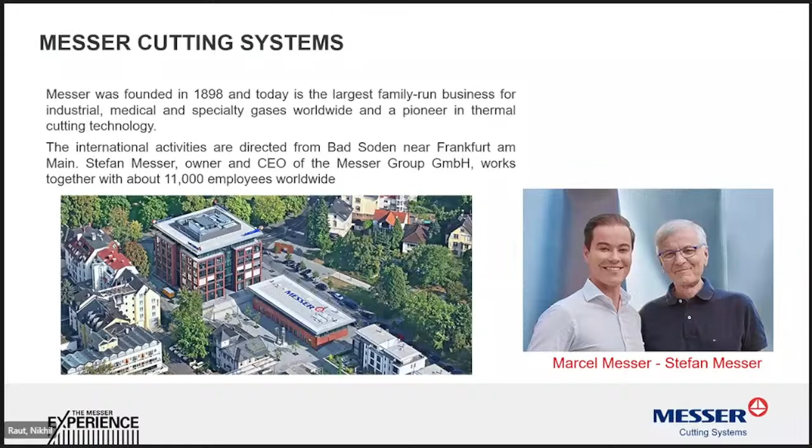Mr. Stefan Messer is the gentleman who was heading the company, and now he has handed over his reins to his son, Mr. Marcel Messer, who is the present chairman of the group.

In terms of how the group overall looks: they are majorly in gases. Unfortunately not in India, but Messer gases are very popular across the globe in Europe, now in North America, as well as China, Vietnam, and many Southeast Asian countries. They also have a group company called Spectron, which makes specialized gas control equipment. Then there is a company called BIT, which is into instrumentation. There is a carbon dioxide special gas company, and also a medical care company in Germany.

And we all belong to the group called Messer Cutting Systems. Messer Cutting Systems have primarily two business verticals. One is the complete gas equipment range, where we talk of right from a hand cutting torch to flashback arresters, panels, and everything. On the other side, it is the complete cutting machines business.

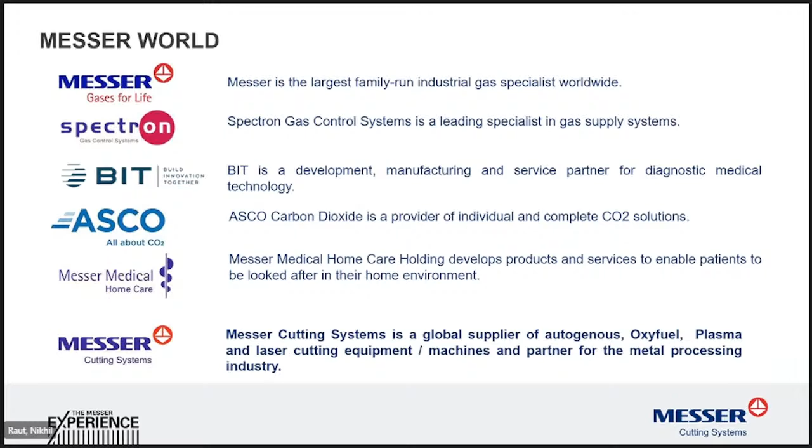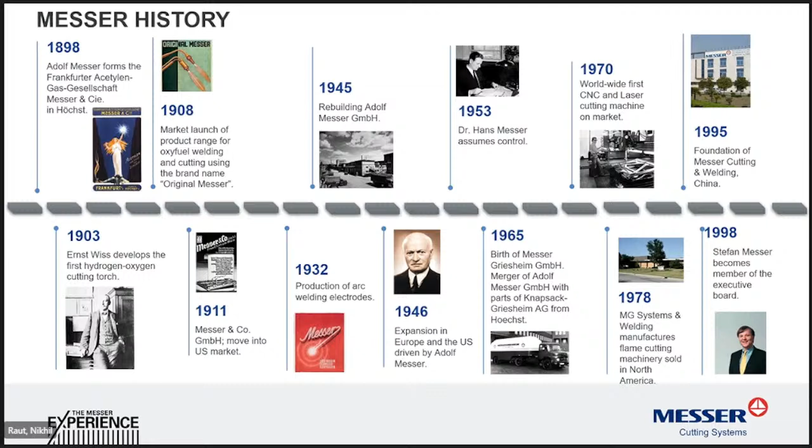So this is how the group looks like. It has a long history - I told you 1898 was the formation. I won't run through all the details, but you can see the different milestones on the part of Messer, and the journey continues. It also includes Messer India operations - I'll come to that, but you can go through the history. One after the other, milestones were achieved over a period of time, and the success story continues.

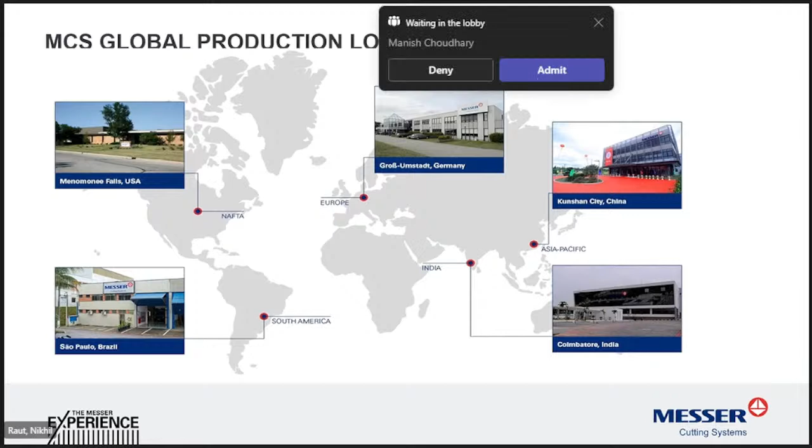Just a little bit about our global presence - the major plant, the mother plant, is in a place called Groß-Umstadt, in Germany. The second big plant is in Menomonee Falls, near Chicago in USA. There is also a Messer plant in the South American continent, Sao Paulo in Brazil, and in Kunshan, China. Our own Indian plant is in Coimbatore, the second largest city of Tamil Nadu. From Coimbatore we cover complete SAARC countries, as well as 6 countries in Africa, and also the Middle East region, as far as sales and services are concerned.

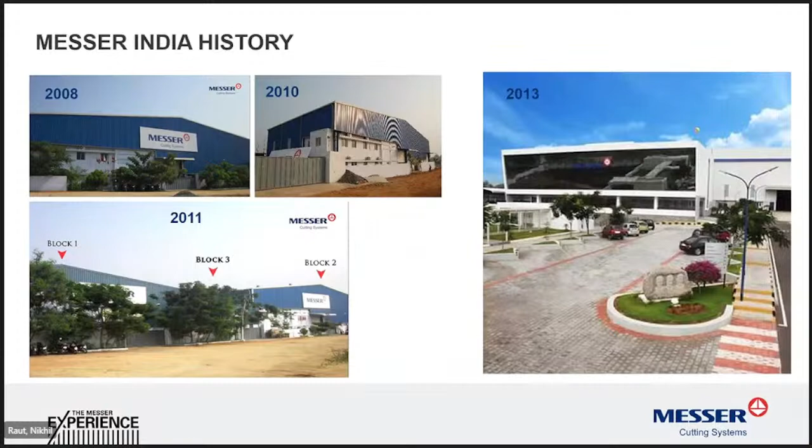I also take this opportunity to invite all my customers from the Middle East and India - in case you can manage it, you can visit this plant, or if you are in Coimbatore for some business meetings, kindly keep half a day reserved for Messer India and connect with the Messer India marketing team. We would like you to visit this plant and see the complete operations, quality management systems, and the complete setup of how the manufacturing of laser machines as well as plasma machines happens here.

We also, as part of the Make in India movement, manufacture gas equipment in a small section of this plant, and we are now exporting this gas equipment as well to Europe. The laser machines manufactured in this plant have also been exported.

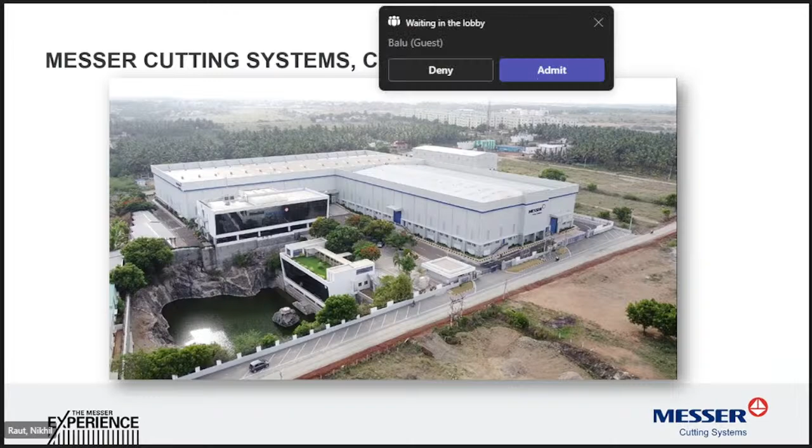Almost 20 machines now have gone to the Americas and Europe, the majority of them to Canada. So that's always a joy for us, made in India, exported to the developed nations. As you know, we are popular for the plasma machines, and we support these machines so they are always in uptime for the customers.

We have a wide network of sales and service team across India. So in every remote corner or industrial town, we have a service engineer who at any point of time keeps in touch with the customers so that all the machine service requirements can be handled. And we have complete design, R&D, sales, service, distribution, logistics, a complete team of approximately 250 employees in Messer India.

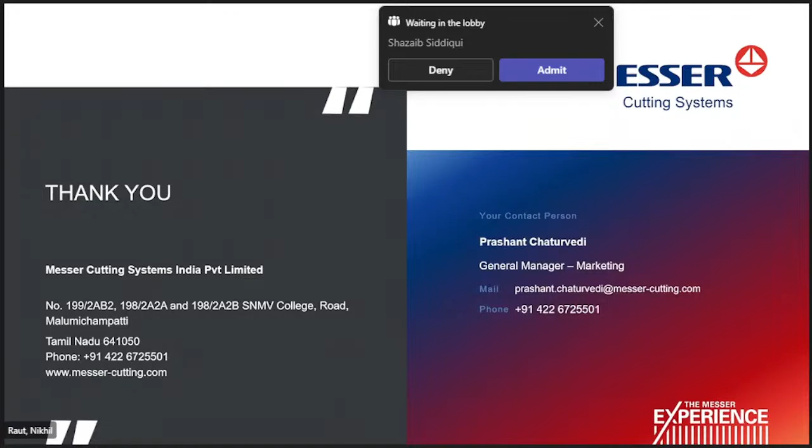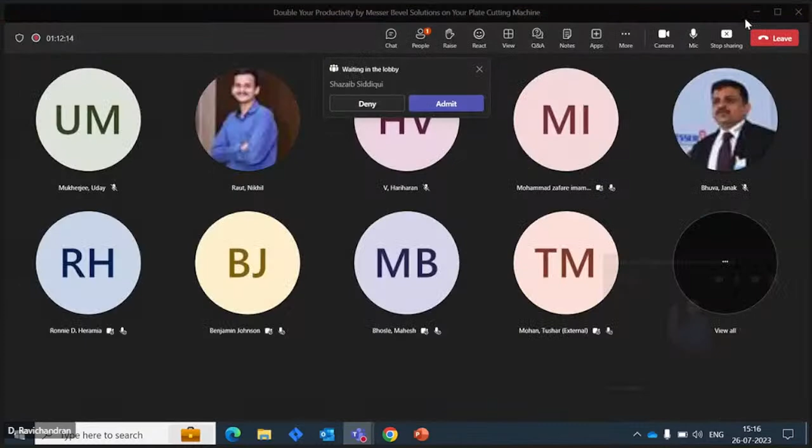Thank you very much. And thank you everyone for joining. Thanks, Prashant. Thanks for the wonderful opening you made. And let me share my screen. Hope my screen is visible. Am I audible? Yes, Ravi. We can see that. Yeah.

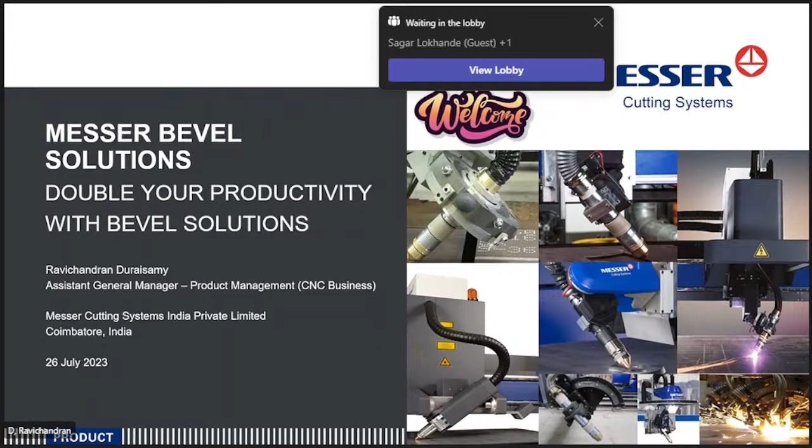Welcome everybody. I'll take a bit of an education mode, first telling you why we need beveling and how beveling has gone from a traditional way of production to automatic beveling. So why do we need a bevel in the first place? A bevel is needed for many reasons, like to create a better weld preparation, or else the equipment itself needs a bevel at the edge for safety reasons or for aesthetics or whatever reasons the equipment is designed for.

So mainly when you have welding, you have different types of bevels, like a V bevel, a Y bevel, a K bevel. All that amounts to getting a larger welding surface so that the welding is better and has stronger welded joints. It also helps to reduce the filler material used during welding. So one is the strength, one is the process optimization, and welding becomes faster, defectless, and stronger. This is in case of welding. And in case of edges, a beveled edge is needed to avoid accidents or scratches, or for aesthetics.

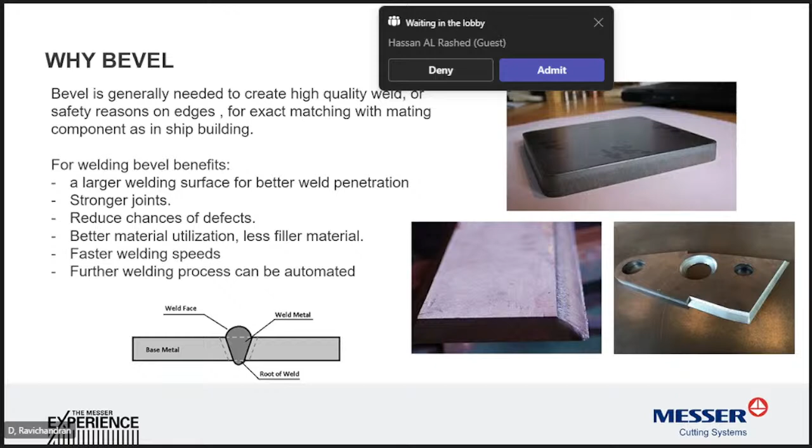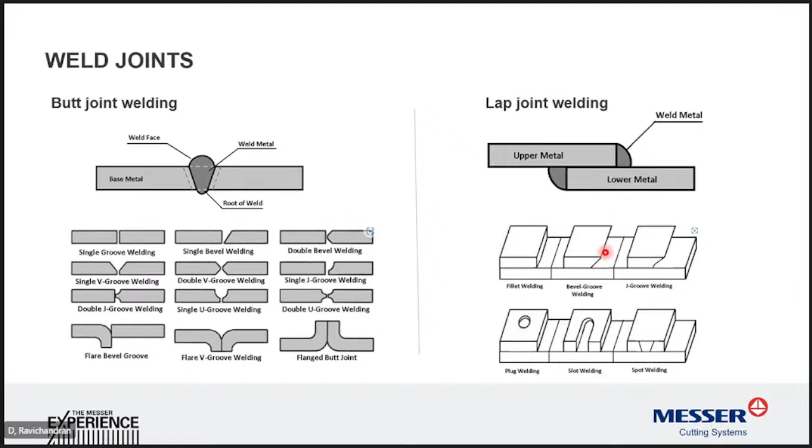So that's how a bevel is being created. And just to understand the different types of weld joints, we have got 5 types of weld joints. All these weld joints are much better when created with bevels. With lap joints also you get bevels. An edge joint is also better when a bevel edge is there, and the same for a T-joint and for a corner joint. So for any welding, it is better to have a beveled edge.

So how are we preparing the bevel in a traditional way? I'm not talking about the sophisticated way. In a traditional way, plates are cut using oxyfuel if it's a thicker plate, then plasma up to 50 to 60 mm, then laser up to 25 to 30 mm. So these plates are cut and the edges are square. That's what we call a vertical cut.

And then they are taken to another work center where the bevel can be prepared using a plasma bevel guide, or by an oxyfuel torch on a pug cutting machine, or you can do manual oxyfuel beveling with an oxyfuel torch, or else you can have bevel edge preparation cutters, where the material is scooped out on the edges using cutters, or by a simple grinding method, which is very crude.

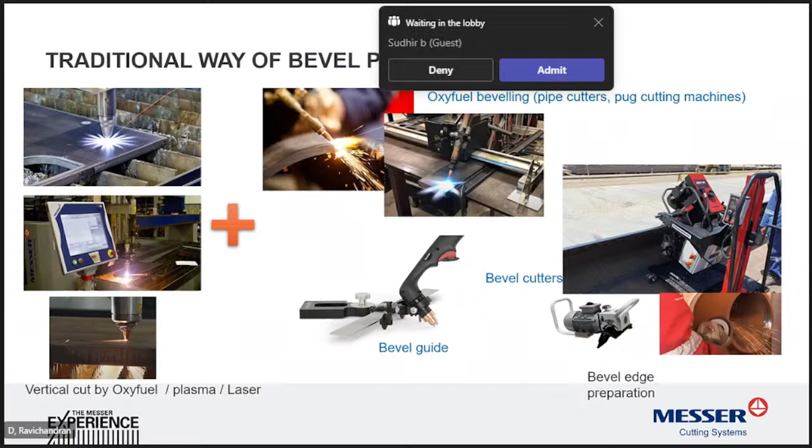The angle of bevel is not maintained throughout. But when you use a bevel cutter and a plasma bevel guide or a pug machine with an oxyfuel, your bevel is as per the requirement, but the time taken to cut is also increased. And moreover, you have an additional operation rather than cutting at the start itself with a bevel. If you don't do it, you have a straight cut, and then you have a second process wherein you have a bevel cutting. So this is the traditional way of bevel preparation.

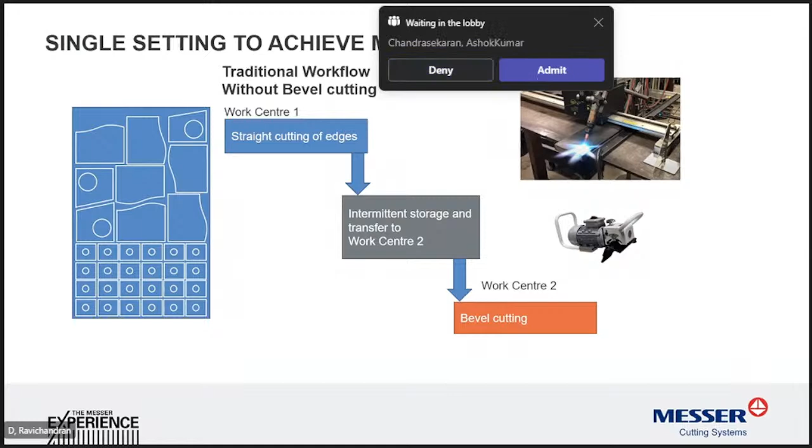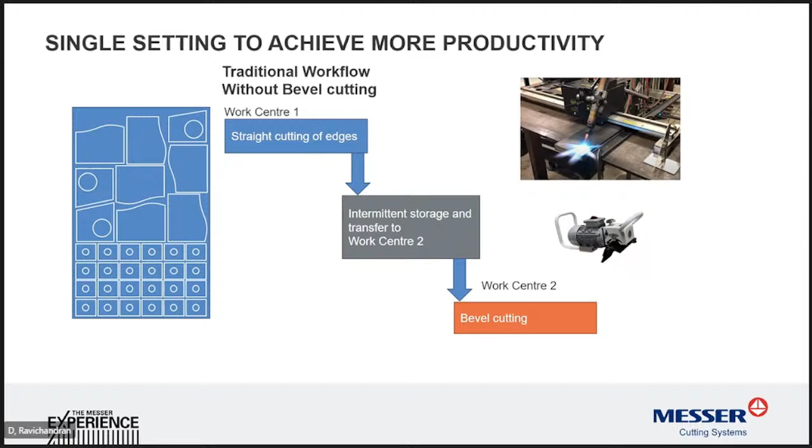When you cut, you have a nesting on a machine, and the edges are cut with a straight edge, and then you don't immediately transfer to the next workstation. You have an intermediate storage, and then you have a next work center. It can be anything: angle grinding, a bevel cutter, manual oxyfuel, or a pug machine. Then you have a second work center where the bevel cutting is actually done. So this is the traditional way.

When you use a bevel cutting machine, you don't take it to the second operation. On the primary machine itself, we have a bevel cutting machine. You actually cut the bevel immediately when you cut the straight edge. Sometimes if it's a V cut, you cut the V cut itself straight. So all fabrication units which are fabricating above half an inch thick plate, and on critical fabrications, have to have a bevel preparation.

I would say 30 to 40% of all the material which is cut by plasma, oxyfuel or laser of a thickness above 12 mm definitely needs a bevel preparation. Generally these are created by a secondary process like I explained earlier. So if we have a bevel cutting machine, all that secondary process is avoided. Your productivity increases by around 30 to 40%. That's how we say double your productivity in those cases.

And because you don't have a secondary operation, your time is saved, your production is increased, and non-value added activities like intermediate storage for the straight cut plates are not needed, and movement from work center 1 to the storage and storage to the next work center is not there. So all those non-value added activities go away, thereby your productivity is increased, your cutting cost is reduced, and your manual labor involvement is also reduced. That's the advantage of having a bevel cutting machine.

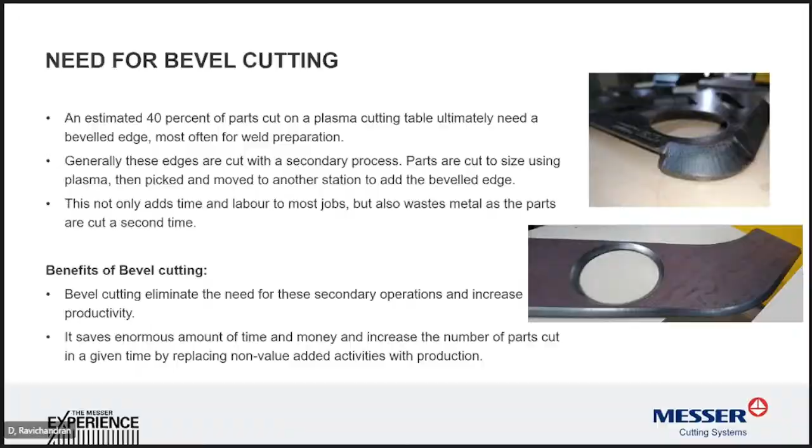In Messer, we have a whole lineup of equipment, from oxyfuel, plasma, and laser to do beveling. On the oxyfuel, we have manual indexing on the torch itself, and then the beveling oxyfuel torch using triple bevel, that's using 3 torches to cut a plate at one time. You can have X, Y, and K cuts, and the same triple bevel on an automatic version, so you can automatically define the angle, and contours can be cut wherein the whole bevel unit can rotate. All this is possible in oxyfuel.

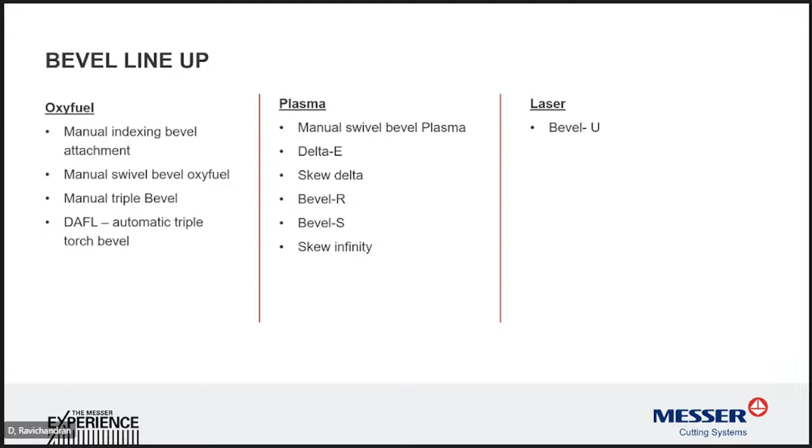In plasma, we have the manual bevel on the X and Y axis, where you just cut straight lines. Others are Delta E, Skew Delta, Bevel R, Bevel S, and Skew Infinity. These bevel equipments can cut between plus and minus 45 degrees on the required contour, as available in the nesting. These are available on different machines and capacities differ. We also have beveling on laser, named Bevel U. So on all 3 thermal cutting processes, we have equipment to cater to bevel applications.

What types of bevel can we use? We can have straight cut and V cut, either V up or down, VAS or VDS. You have the Y cut, so the material is cut like this and the opposite material comes here for welding; this is YAS and YDS. The X cut, where you don't have a land between both bevel edges, and the K cut, where you have a land between the top and bottom bevel surfaces. These are the types of bevels normally needed, which can be cut by the bevel equipment.

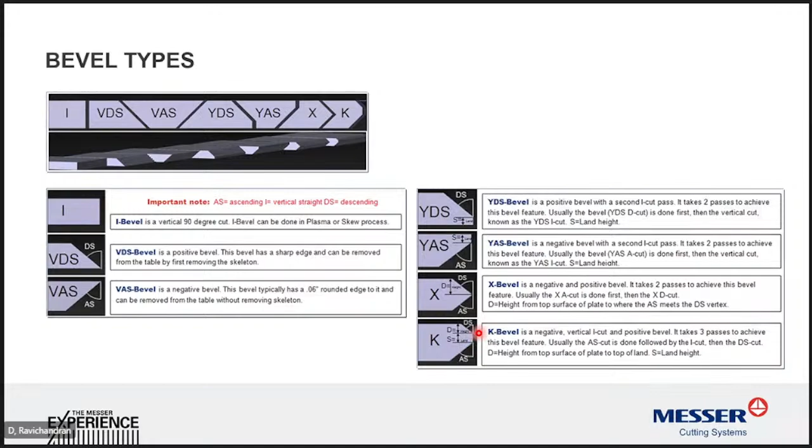And coming to the lineup, I will just breeze through the different types of bevel equipment we have, right from the ordinary bevel torch attachment to the sophisticated bevel cutting equipment.

So the first one is a swiveling torch attachment, which you can see on our MS932, where it can be angled along the X-axis, or it can be turned and pushed on the Y-axis. So you can cut a straight bevel or in an inclined direction also, but only in a straight line. So this is just entry-level beveling equipment, which can be used in one of our torches called MS932.

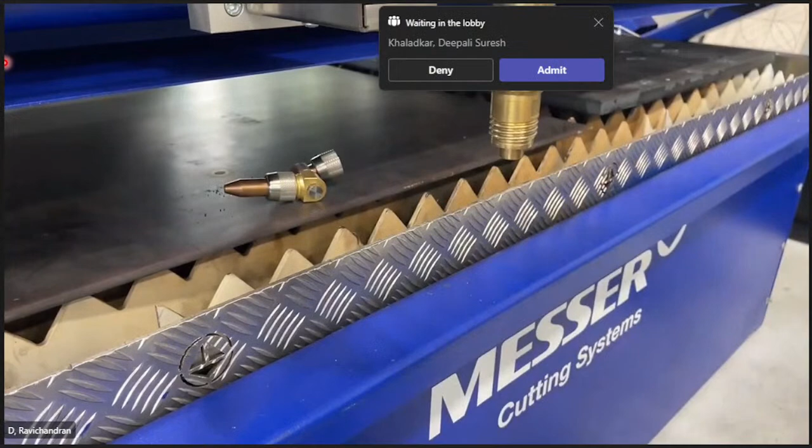And the video is, so the torch in the nozzle is replaced by a beveling attachment. And it can be rotated on the X and Y axis, and you can cut the bevel.

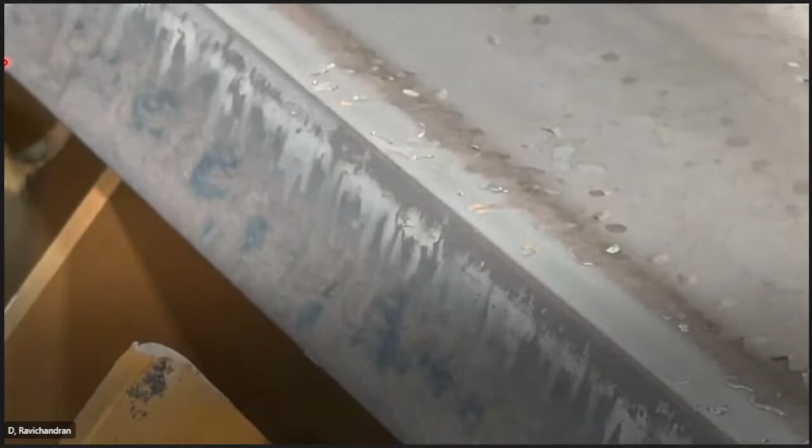And the next one is the manual indexing bevel, wherein only on the X-axis you can do the beveling, and we have a scale on the torch mount. So the torch can be swiveled, and both our MS932 and ALFA torches can be adapted to this, and we can have bevel cutting in the longitudinal axis. These are available in all our legacy machines: OmniMat L, MultiTherm Pro, Profitherm, and TerraBlade D.

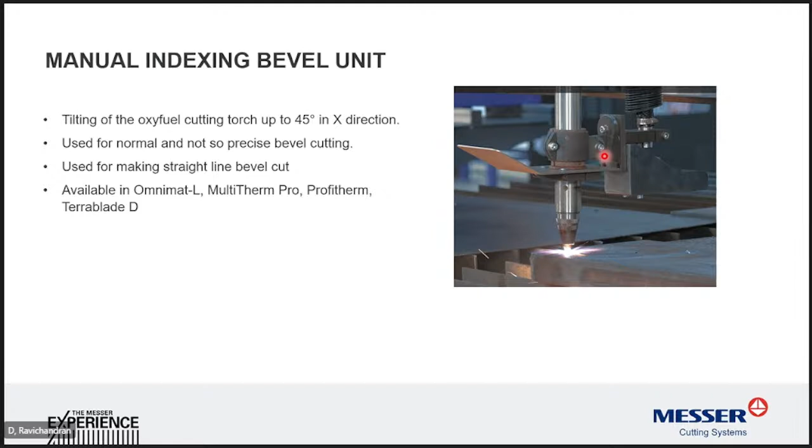And next comes the manual oxyfuel triple bevel. This has 3 torches. These are special short torches mounted on the unit, which can create a straight cut using one torch, a K cut using 3 torches, or an X cut using 2 torches. The only thing is we don't need to remove it; it's only the ignition part of it. So you can have a straight, V, X, Y, and K cut also.

And the cutting is done simultaneously as 3 torches are involved in the bevel process. The angle and the distance between the torches are all manually set. And you can have strip cutting also; you can cut 2 strips when the 3 torches are vertically straight, pointing downwards. And at plus or minus 45 degrees, you can have the bevel cut.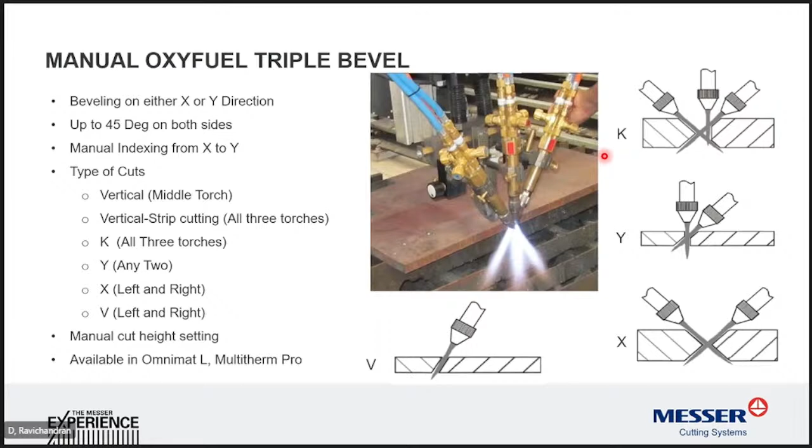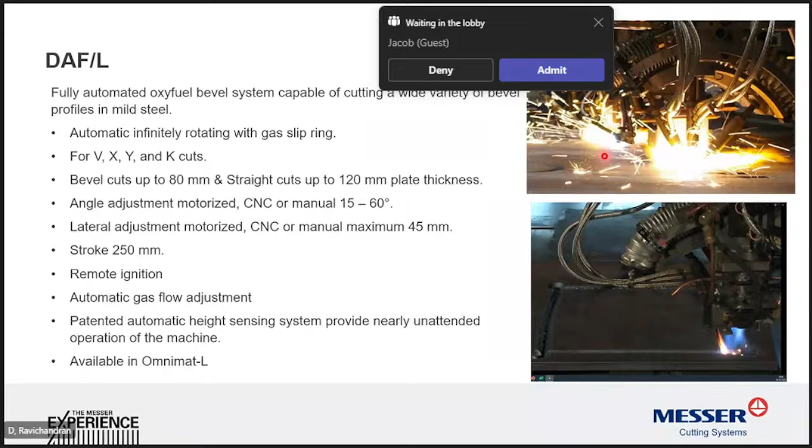And the next one is the DAF/L, wherein the same thing you've seen earlier is automated. Automated in the sense that the bevel angle can be programmed and contours can be cut. The earlier oxyfuel bevel cutting equipment I've explained is for straight cutting only. But this particular DAF/L torch has the provision to cut along contours. The whole unit can rotate, so you can have full circular cutting of bevel or any contour needed.

So you can get V, X, Y, and K cuts, similar to the other one. But the maximum cutting thickness would be up to 45 mm. This is available in our OmniMat L, which can go up to around 10 meters of track width. These are mostly used in windmill operations and shipbuilding operations.

So this is just information on the bevel angle, what can be cut, and the thickness: from 16 up to 45 you can have, and the maximum bevel angle is up to 60 degrees, whereas the other bevel units were only up to 45 degrees. So these are all about the oxyfuel bevel units.

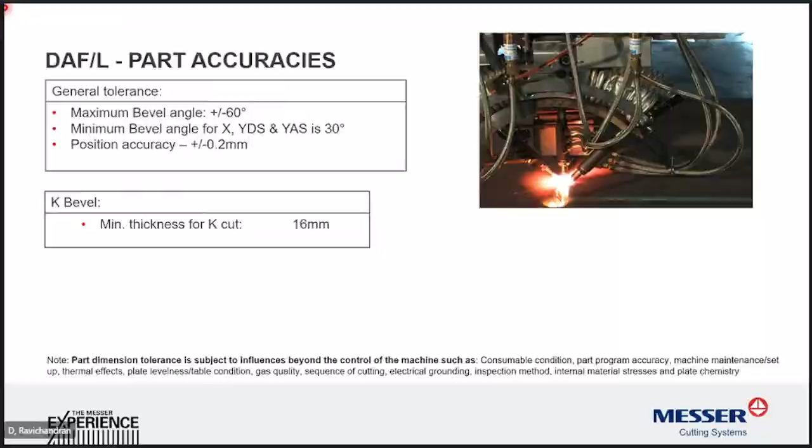The next one is the plasma bevel units. Starting, I'll talk about the manual swivel bevel, wherein the torch is held on equipment with a swiveling attachment of plus or minus 45 degrees. This is applicable for bevels only in the longitudinal and the transverse, that's the X and Y direction, and you can go up to 45 degrees.

You have to manually index the torch, move it, lock it, and then do the cutting. So this is our plasma manual swivel bevel. And for automatic beveling, we have 4 types of automatic bevel units.

One is the Delta E, which can cut at plus 45 to minus 45 angle. And then this is not an infinite rotation. This has got a limitation wherein you can rotate the torch for 460 degrees, and again it has to retract back, but that will not affect the cutting.

This is a TCP bevel unit, and this can be used for plasma cutting application up to 800 amps. That's the USP of this unit. And then this is like plus or minus 45 degrees, and you can have a V, a Y, an X, and a K.

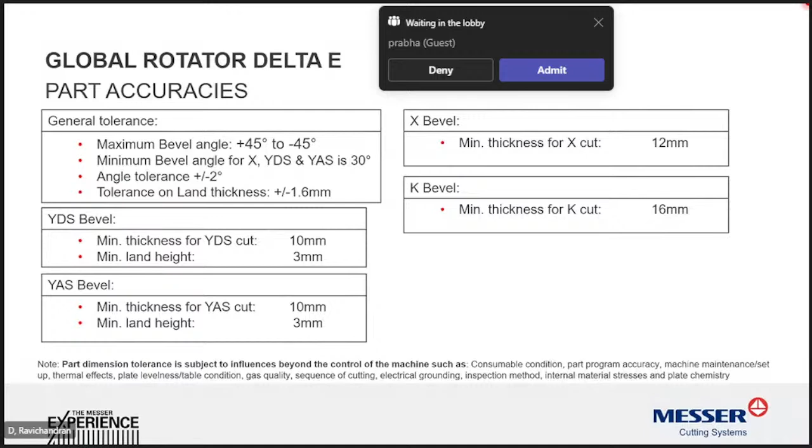So minimum thickness of plate where a bevel is possible is 10 mm in case of YDS, that's a Y angle. And then X bevel is where you have the bevel cut crossing at the middle of the plate; its minimum is 12 mm. And when you want to have a land in between the top and bottom, the minimum thickness of the plate is 16 mm.

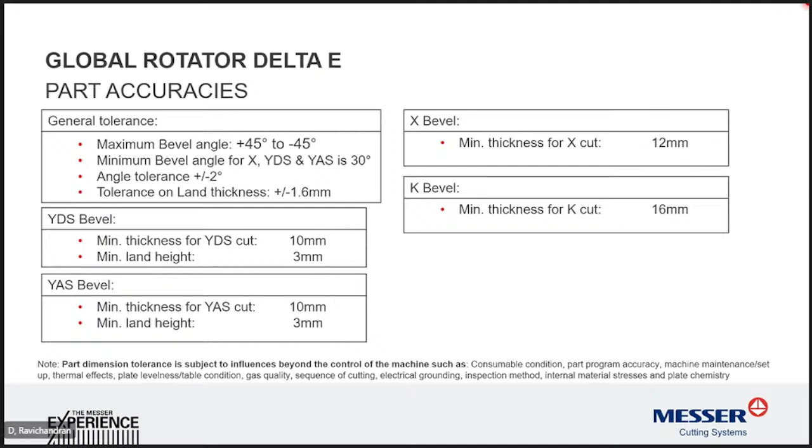So if you can see, this is a full-fledged automatic bevel unit. There's no manual setting or manual guiding or manual locking on this unit. It straight away comes from the controller; it's fully operated by the controller. Only thing is it can be used for bevel cutting applications using 800 amps.

A similar type of equipment, only the cabling management is different, and for bevel cutting application up to 400 amps we have the Skew Delta. It can be rotated up to 450 degrees, and it's a compact unit. You can have even a glare curtain so that the operator doesn't have the effect of looking at the plasma flame.

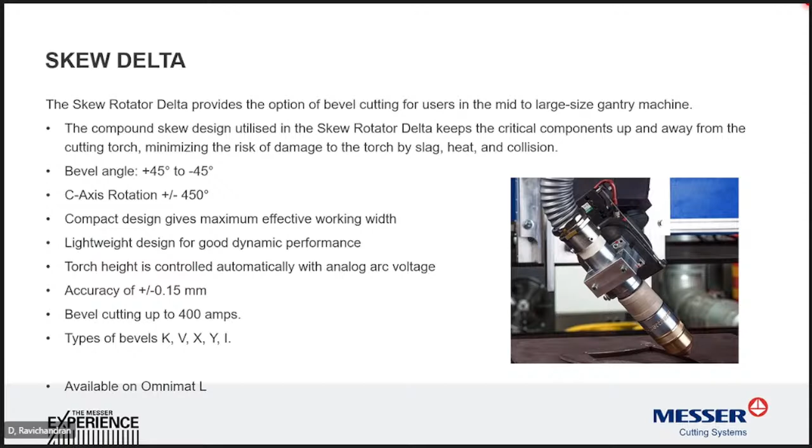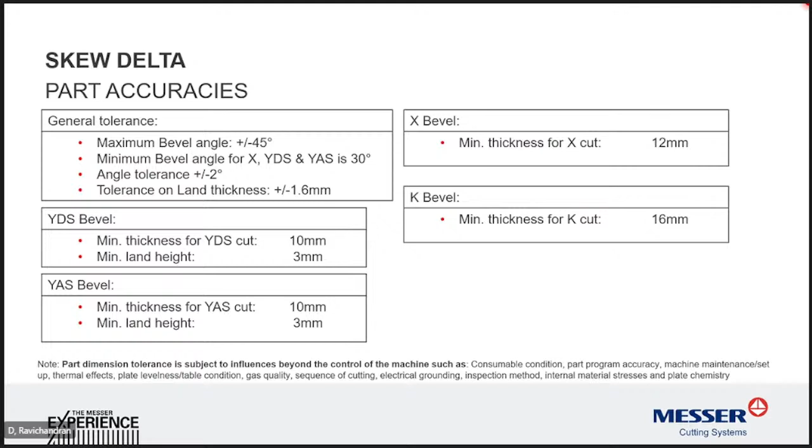Other than that, this is available in our OmniMat L, and this is actually a product designed in Germany, which we are manufacturing over here. In a similar way, the same cutting parameters of thickness for YDS, the X bevel and the K bevel remain the same as in the Delta E.

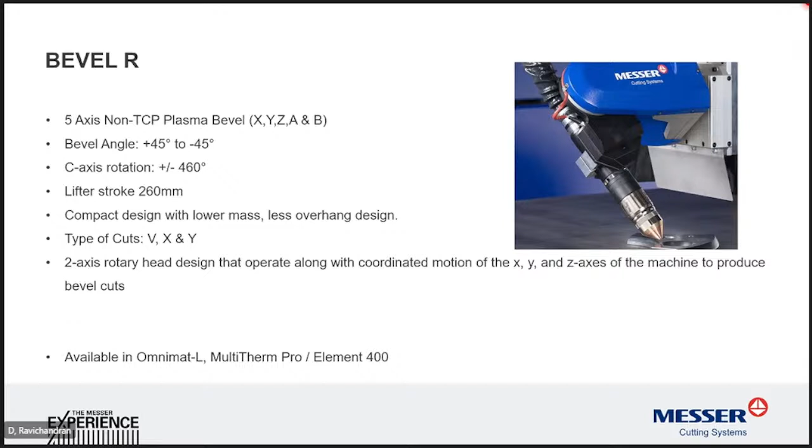And the next is our Bevel R. This is a lighter, compact bevel equipment, which can be available in all the high definition machines like OmniMat L, MultiTherm Pro, and Element 400. Similarly, C-axis rotation is 460, you can have a bevel angle of minus 45 to plus 45, and it has an individual lifter for 260 mm.

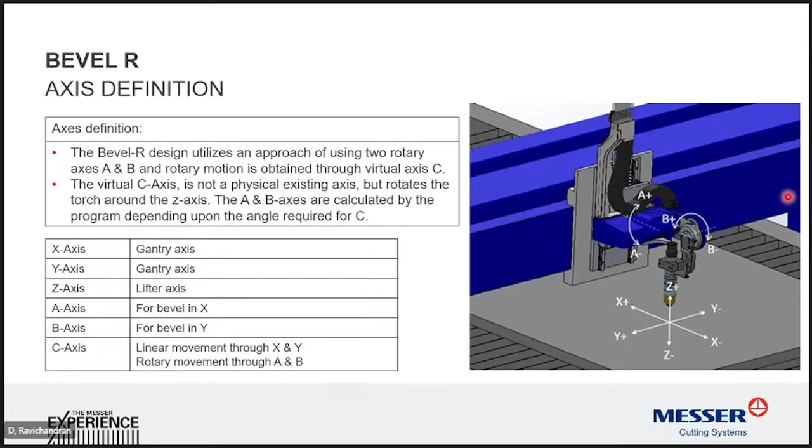And since it's a compact and overhang type of thing, this is not a TCP bevel. It takes the machine movement also in synchronization to create the bevel. So you have the B rotary axis of the torch and the A axis on the transverse plane, and these two axes in combination with the machine movement of X and Y create the bevel cutting. Similarly, all the bevel cutting parameters remain the same in terms of thickness.

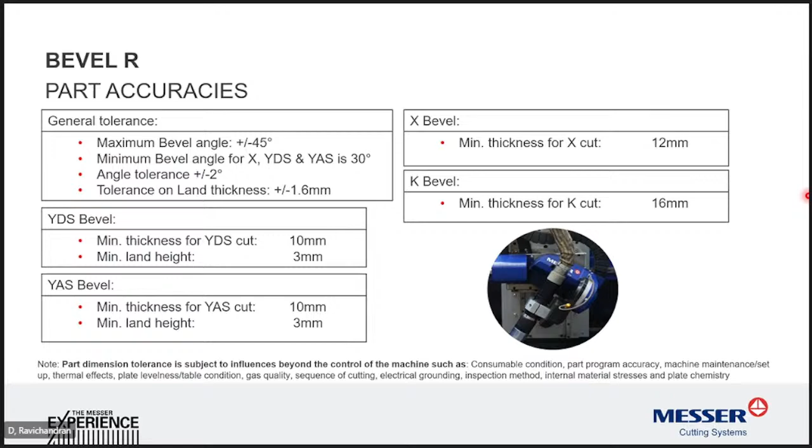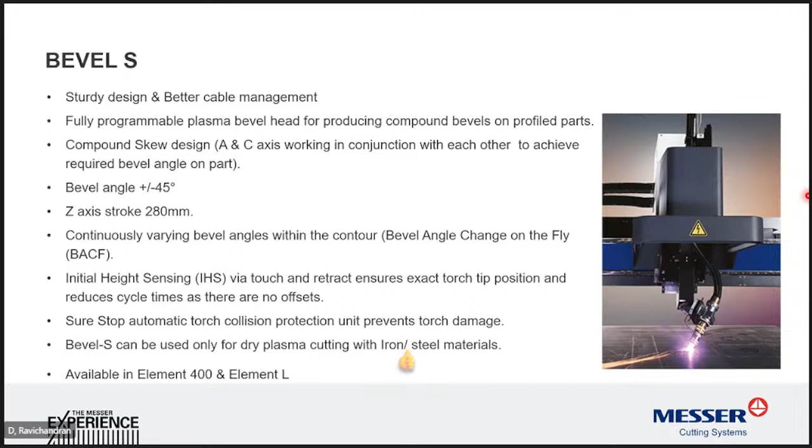And this is a picture wherein you have two axes on the bevel with a rotary unit. This is a TCP, where the machine movement is not included when you want to have a bevel, unlike the Bevel R. All the bevel parameters remain the same as the previous ones. And this is a video to showcase how it's operating.

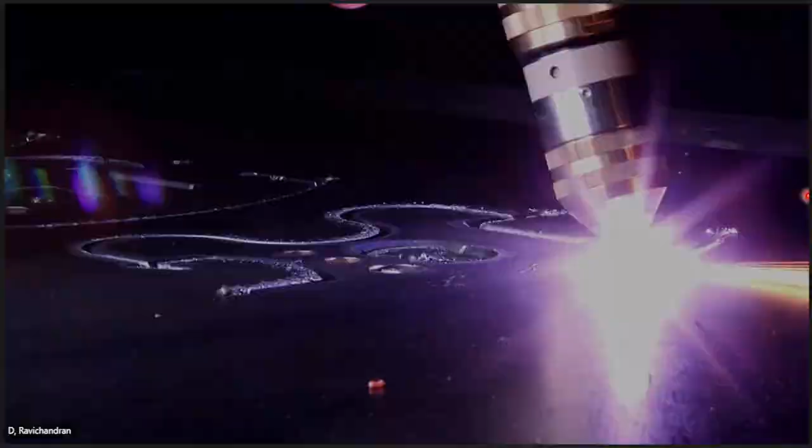Next one is the Skew Infinity. Earlier we were always talking about a rotation angle of 450 to 460 degrees. So when a bevel unit cuts a 360, you have an excess angle of around 50 degrees on both sides, but still it has to return back to its home position to cut the next circle. But this Skew Infinity doesn't have that limitation.

We call it infinity because you can rotate it in an infinite way, and the unit need not retract back. So what happens is you don't lose time for the unit to retract back to its home position. Apart from that, the same thing, like bevel angle can be from minus 45 to plus 50 degrees and unlimited C-axis rotation. So when you don't have the limitation of the torch coming back to its home position, you don't lose time. So this reduces the cycle time of cutting.

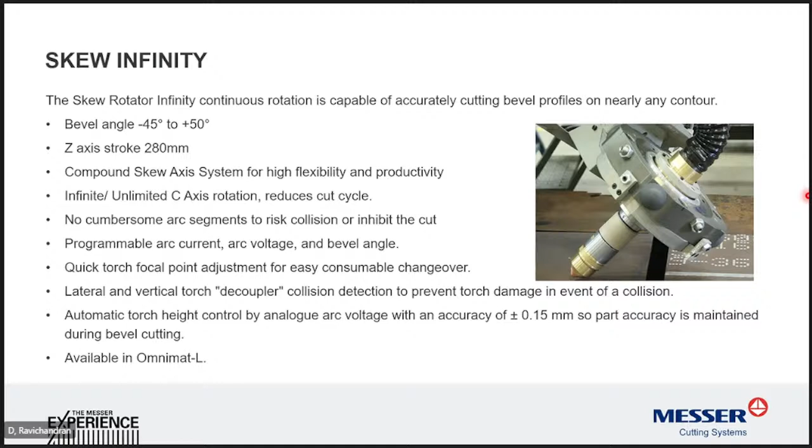So this is available in our OmniMat L. Again, to say OmniMat L, you can have it up to 10 meters width. Skew infinity, the same thing. And the cutting parameters remain the same in terms of thickness.

Then laser bevel. We are the only company in India who can offer, in the sense made in India, laser beveling as of now. So this has got a B and A axis, which rotates along the longitudinal and the transverse direction to create the bevel. You can have contour cutting, bevel contour cutting. And again, the angle is between plus or minus 45 degrees.

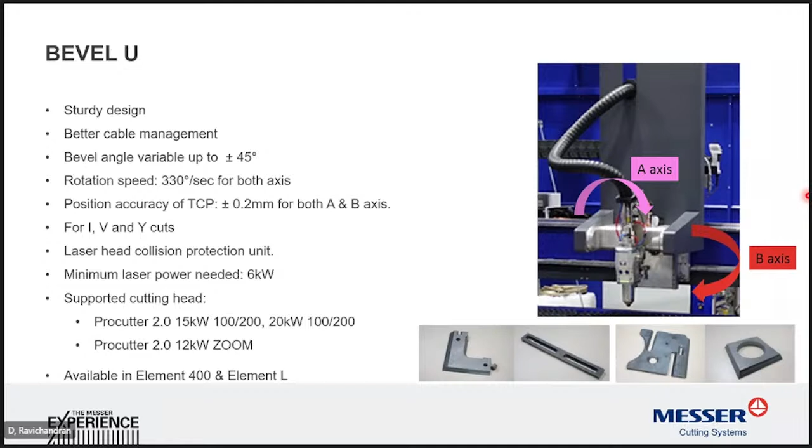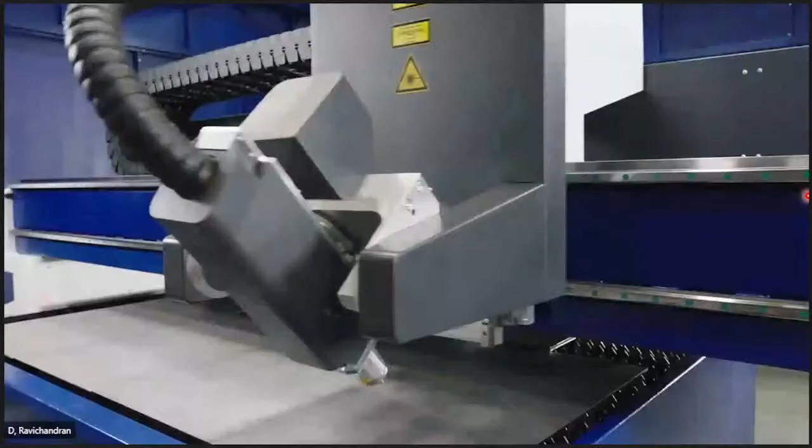And this can be used with the laser power of 6 kilowatt and above, because that's the minimum power you need to have for a 25 mm cutting. So this is available in Element 400 and Element L. So this is a video to show how the laser bevel is used. Here we are cutting a Y bevel, so a straight cut has already been made and the bevel portion is being cut.

So this is the lineup we have. We have a whole range of beveling equipment for oxyfuel, plasma, and laser applications, and to show a gamut of these bevel units with the compatibility of our machines. We have a whole range of machines: TerraBlade, Profitherm, Multitherm, OmniMat, and Element 400, wherein OmniMat and Element 400 are machines where laser can be used, and all the other machines are plasma and oxyfuel machines.

So now to go back to the earlier slide, where I was showcasing that the traditional way was cutting a plate for a vertical edge, square edge, and then creating the bevel by a secondary operation. Now is the time where we can embrace the new technology by using the bevel units, be it plasma, oxyfuel, or laser. Thereby, we can reduce your process time by around 40%, and cost by at least around 30%. And you are not duplicating your assets for creating a bevel edge.

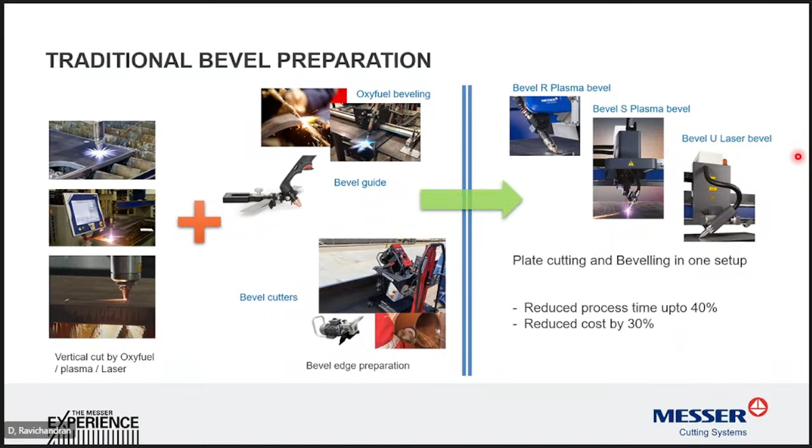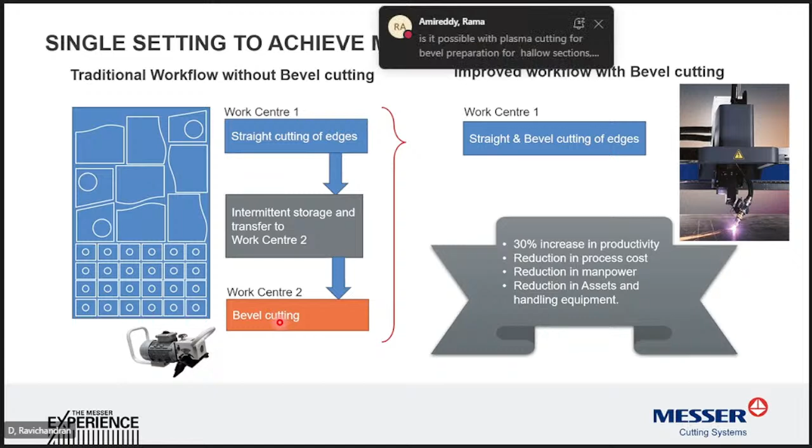Earlier, a traditional flow would have a nesting where straight cut edges were cut, and then the bevel cut in a second work center. Now in a single work center, the bevel is cut straight away, right from the plate itself, so that your productivity is increased, your process cost is reduced, your dependency on manpower is reduced, and there's a reduction in dependency on handling equipment and assets.

So this is just to show you the gamut of machines. We have the Smart Blade, TerraBlade, Profitherm, Multitherm Pro, all oxyfuel plasma machines. And OmniMat L and Element 400 are oxyfuel and plasma, and laser can also be used in these machines. Here in these two machines, we have the simple bevel attachment for oxyfuel. In Multitherm Pro, apart from the oxyfuel, we have got the Bevel R, where you can cut the contours using plasma.

In OmniMat L, you have oxyfuel beveling on contour, as well as the Bevel R and Bevel S. And in Element 400, we have got the Bevel R, the non-TCP type of bevel unit, the Bevel S, which is the TCP type of bevel unit, and the Bevel U, the laser bevel unit.

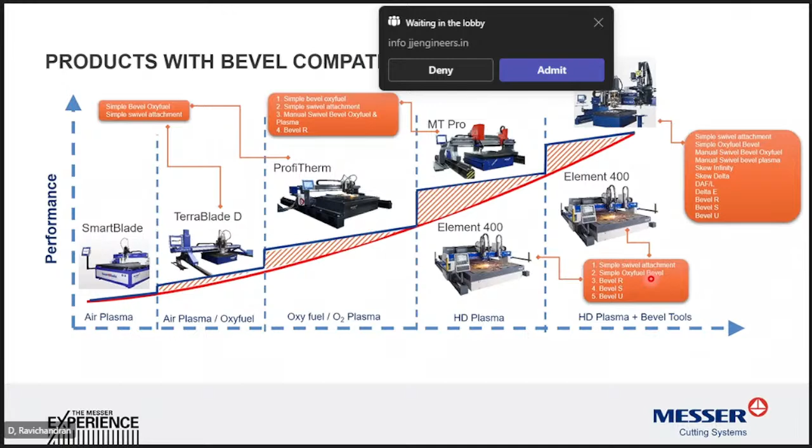So I think I just breezed through, not much in detail, and I would ask Mr. Janak, our Director of Sales, to take us through the application part of bevel cutting. Over to you, Janak. Thank you, Ravi, for giving the brief introduction about the bevel cutting tools we have available.

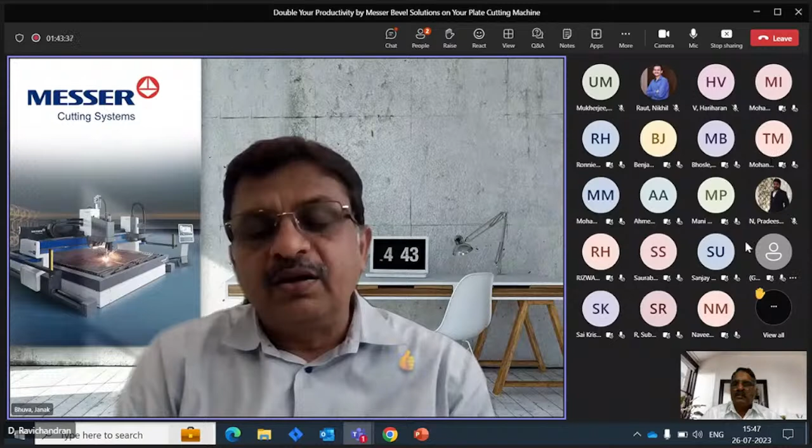I will run through the practical applications available in the case of the bevel application. It's very important to know, as Ravi mentioned, that when you do the bevel, the demand of accuracy level is very high, and the tool we use should perform in that direction. If you are not getting enough accuracy while performing the bevel, it cannot be used for automation applications like automated welding or robot welding.

Since this is not a contact cutting, the plate is not cut by the contact process, it's by the thermal process, either oxyfuel, laser or plasma. These are non-contact cuttings, so tool and machine response time is very important to get the accuracy and dimension of the parts. That is where Messer plays an important role, and over the period of time we try to improve productivity by providing good accuracy cut parts for bevels, so you can use these parts for further processes like automation welding or robotic welding.

With this, I will go through some industry uses for bevels. As I said, this covers plasma, laser, and oxyfuel. Primarily plasma bevels are used in railways, heavy fabrications where people use high thickness, maybe 30-40 mm, apart from yellow goods like JCB, Hyundai, Sany Electric, Sany Heavy Engineers - there is very good application there. Then PEB manufacturers, shipyards, boilers, and construction and mining equipment. These are the industries where plasma bevel applications are mostly widely used worldwide, and slowly people in India have started using this.

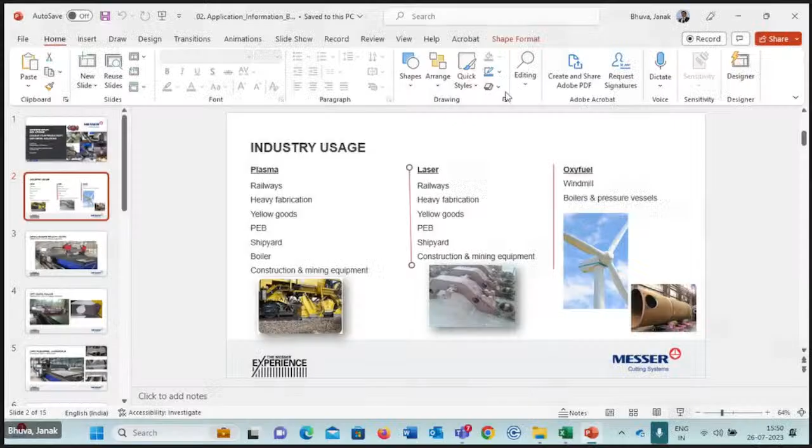I was talking about construction and mining equipment, where plasma bevel applications are widely used worldwide, and slowly it's getting used in India also. Earlier any automatic bevel equipment was very costly and capital investment was very high. Over the period of time, it's reduced drastically. If you compare today's bevel application machines, it's almost half the price of what it was around 2010 or 2015, and that is the reason small fabricators or vendors of big companies have started using plasma application also.

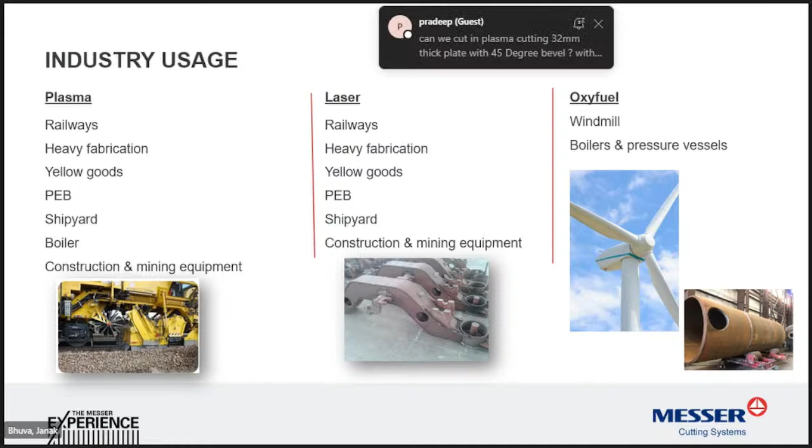Apart from this, we have laser. It's mostly used in industries like railway, again heavy fabrication, yellow goods, PEB, shipyard, and construction and mining equipment. Laser is mostly used below 20 mm where the bevel is required, mostly in V cuts, where you don't require the root face. That is mostly used by people in laser applications with bevel. Finally, windmill, boiler and pressure vessels, where the thickness is sometimes more than 30, 40, 50 mm, and with mild steel people use the oxyfuel bevel. So these are the three processes - plasma, laser, and oxyfuel - used in various industries, as I mentioned.

To give you an example, this is one customer called Mega Servo, located somewhere near Hyderabad. They are using our plasma bevel for their railway equipment. This customer is a railway equipment manufacturer, and they are using plasma bevel with a 300 A plasma power source with Bevel R, which is a fully automatic beveling tool.

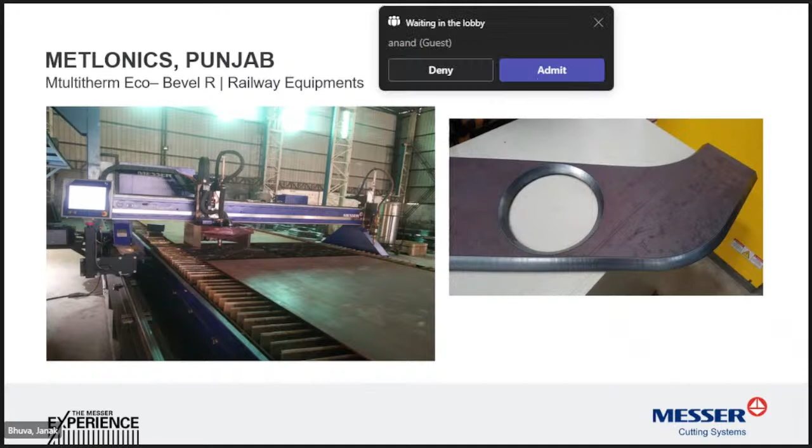Moving to the next one, this is Metlonics. You can see on the right hand side the cutting components, where inside the job the circle is cut at 45 degrees with some root face around 2 mm. You can easily see it, and the outer portion is only the V cut. This kind of component can be cut with Bevel R using the Multitherm Eco application. This customer is located in Metlonics, in the Punjab area.

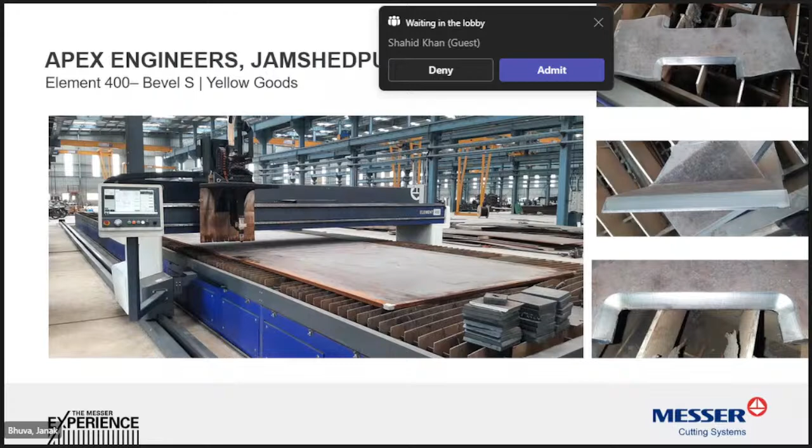When you use the bevel tool on your plasma machine, there's a very important advantage that a lot of people forget. Any plasma cutting, straight cutting, will have a taper, and by putting the bevel tool, that taper can be eliminated. You can cut plasma parts in straight cutting with almost zero taper, because bevel tools have a facility that automatically compensates that 1 or 2 degree plasma application limitation angle in reverse direction. So this is one of the advantages even in straight profile cutting when you have a bevel tool available. It's a very important tool that can improve your quality of cut without taper, with almost zero taper.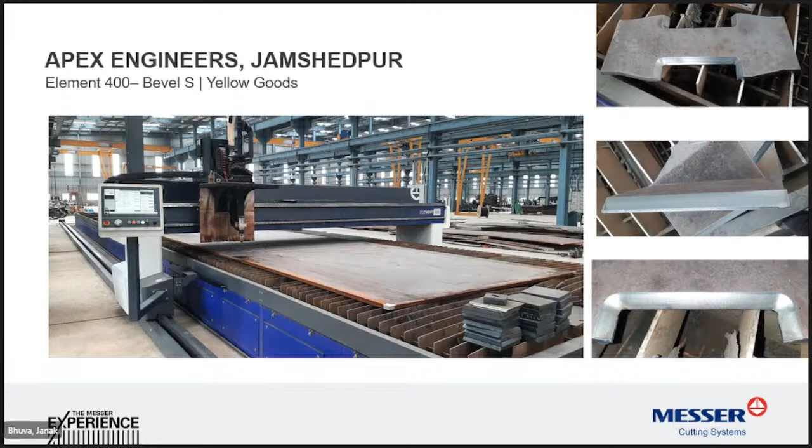This is another example, an Element 400. We installed this machine around 4 years back with the 400 ampere plasma power source, that is Hypertherm. You can see on the right hand side some components with V cut, Y cut, and root face around 6mm, 4mm depending on customer requirement. Some job is 50mm with 4mm root face. This machine length is around 40 meters and width around 6 meters.

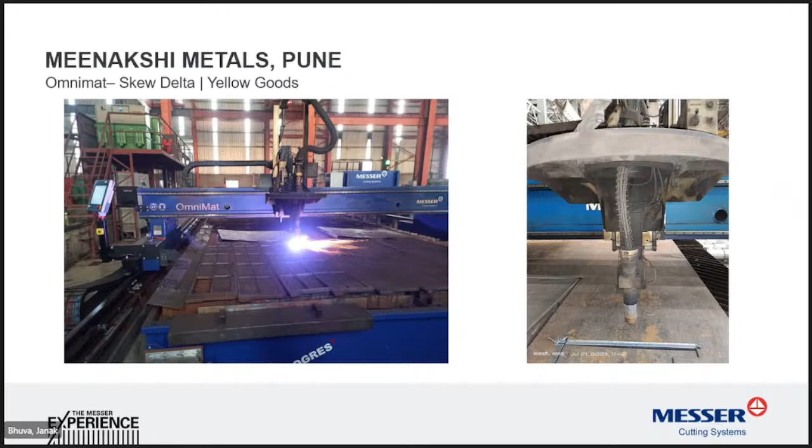This is another one, installed around 2 years back, at Meenakshi Metal. They are job work or vendor of big companies like Plasser, and also vendor of the railways, doing a lot of jobs for them. We installed the Skew Delta with the Omnimat machine, also with 400 ampere. This machine can pierce up to 50mm and do bevel on any job up to 50mm mild steel, SS, or aluminum plates.

This is the Omnimat again with the Skew Delta and Kjellberg power source called Hi Focus 360i. This company is located in Baroda.

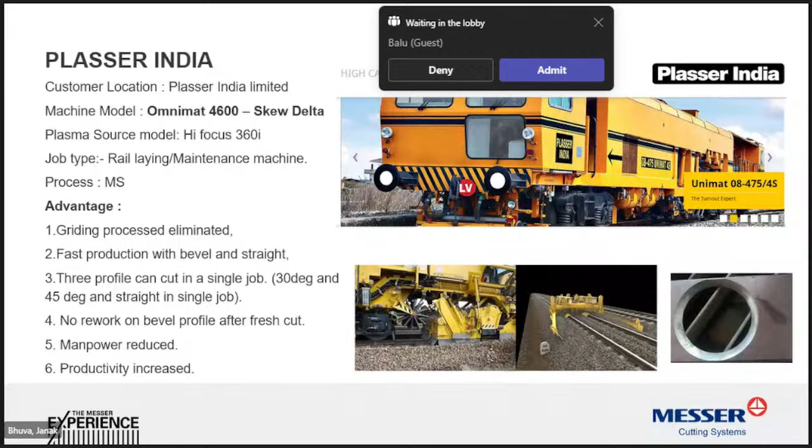This track laying equipment company called Plasser is basically a multinational of Austrian origin, and they started using the bevel machine with the 360i. They are doing 16mm, 20mm bevel with root face around 2mm, 3mm throughout the profile, mostly to manufacture rail track laying machines which they supply to the Indian railways. This is very important, and accuracy for this kind of job is very high, so they require consistency of 2mm root face, which our machine can easily give in plasma machines.

Normally this kind of machine has a very wide width, around 8 meters, 10 meters, depending on customer requirement, because normally plate size in shipbuilding is around 4 meters, 4.5 meters. So we provide around 11 meter width machines, and length around 40 meters, where they can keep 12 meter or 16 meter plates simultaneously parallel together. This is a very typical application where people can do mirror imaging together with bevel application. Recently we also supplied Cochin and Hooghly shipyard similar kinds of machines to manufacture ship activity in Hooghly, Kolkata.

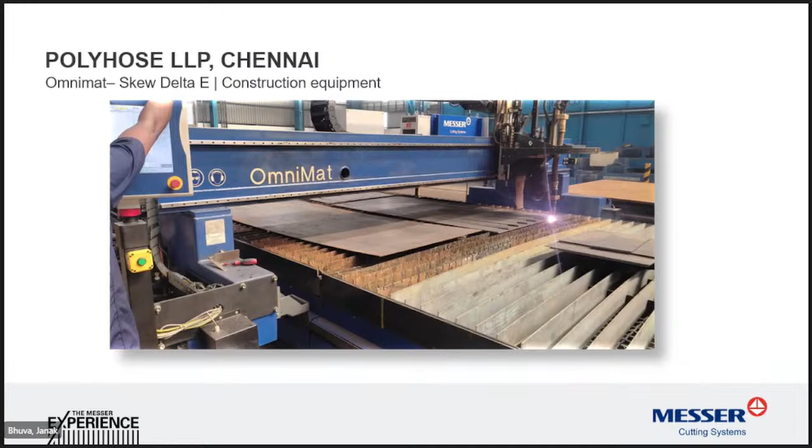This is another one, a yellow goods supplier, construction equipment manufacturer, or vendor of construction companies like Lee Boy or Komatsu, with a big workshop in Chennai area. We supplied one bevel machine for their applications with the 300 ampere plasma power source and Delta E kind of skew rotator.

This is Amtek Rajpura. We supplied this machine in 2008 or 2009 for a railway coach manufacturer. You can see the bogie component below, the next welded component, and also the cut components above. This machine is in the Punjab area with a HPR400XD.

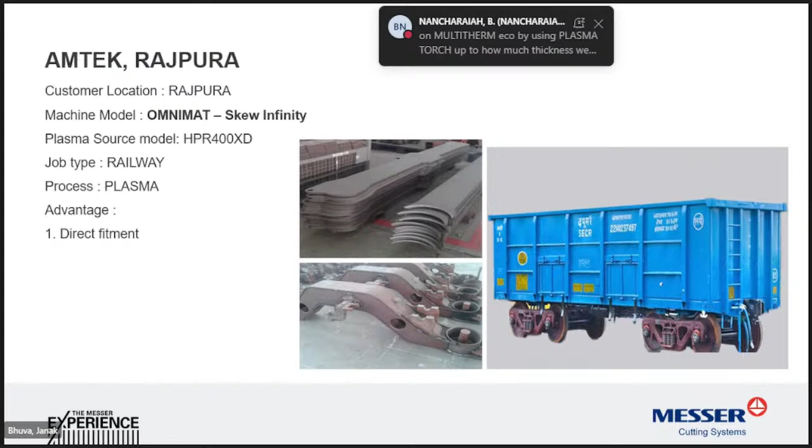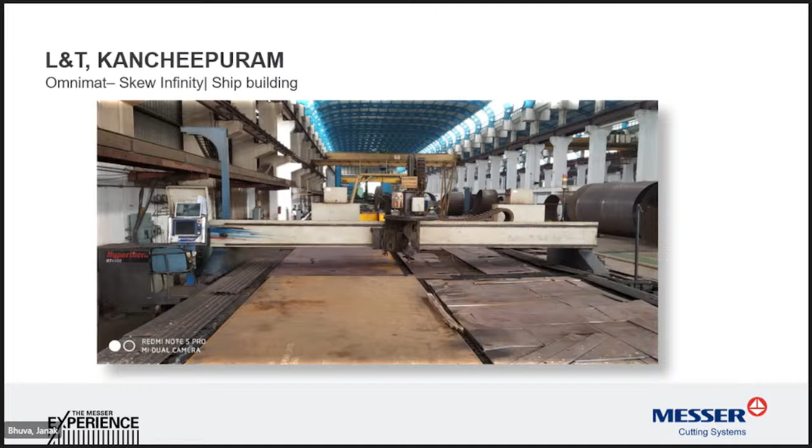This is the L&T Kancheepuram, where we supplied the bevel unit with the Infinity rotator around 2006, and it's still in working condition. These are a few DAF/L applications, and as I said, mostly windmill manufacturers use the DAF/L.

This is the fully automatic bevel equipment for the oxyfuel process, where 3 torches are used together, and all 3 torches are motorized. You can change the position as per your requirement through the program. You need not change anything manually while cutting.

You can define your angle as per the job requirement. One side is 35 degrees, and the other side is 45 degrees. The tool automatically sets while cutting this particular angle, and these 3 torches also have lateral movement. Everything automatically switches on and off together along with the cutting process.

You need not stop the machine and set the angle for the other profile or other part of the profile. This is a fully automatic machine. You can define every angle and also the root face in your nesting program. So this is fully automatic, as I said, and this is what we supply.

This is mostly used in windmill tower manufacturing, tubular towers, starting with Suzlon, then Inox Wind in the Gujarat plant, Inox Wind in the Madhya Pradesh plant, then Windar, Anand Engineering, that was way back in 2008. Apart from this, earlier it was available at Global Wind in Silvassa.

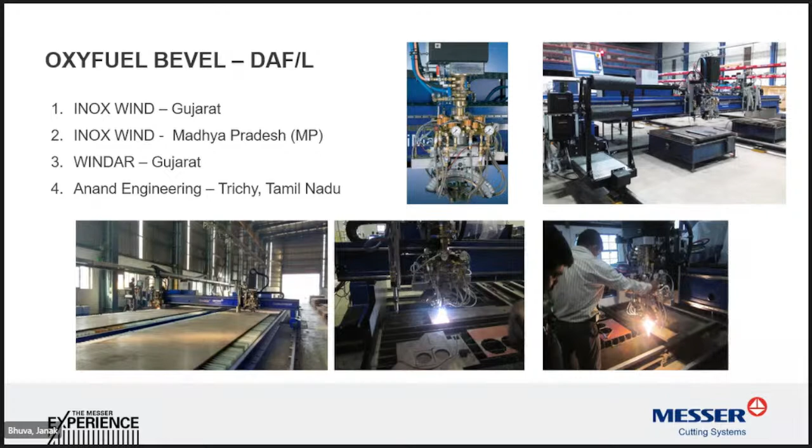With this, I will complete my presentation. If you have any query, please write to us. Thank you.

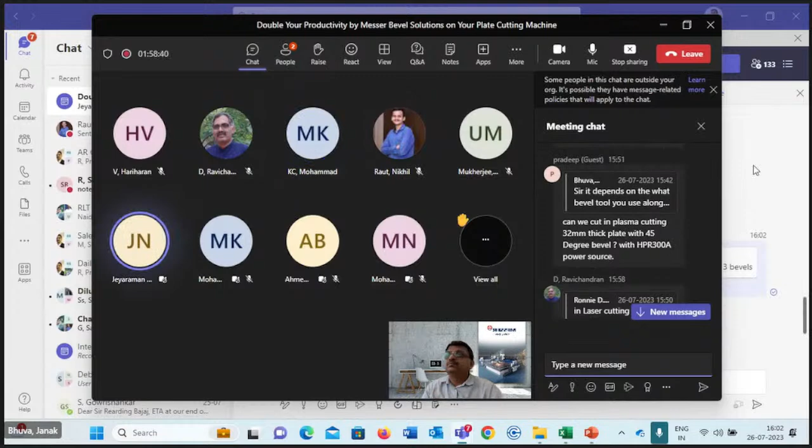Yes Jeyaraman sir, I have one doubt. For beveling in oxyfuel on a 12-meter plate, I am going to bevel. During beveling, the second part will be affected. Sir, what kind of bevel do you want to do? For example, 30-degree beveling in a circle.

Okay, 30-degree in a circle - I think you don't have a bevel machine there, right sir? Yes, oxyfuel, right? Yes, so you require fully automatic in circle - fully automatic bevel machine, Defel. You can do 16 mm, it's possible. V cut is easily done. If you want to do a Y cut, then with oxyfuel it's a little bit difficult. How much root face you want to keep, that's important. 16 mm V cut can be done with the Defel, sir.

Circle - sir, how is it, one part is beveling, another part is normal straight cutting. Is there anything that affects the dimension in the other part? No sir, no.

Because sir, bevel is very important. The accuracy of the machine and how the machine's feedback system works in a bevel machine, that is where the quality of machines comes into the picture. Because, for example, if you have a 10 meter or 5 meter length plate and you want to do the bevel, normally you have to keep the plate at 0-0 balance. That means there should be no up and down in the plate.